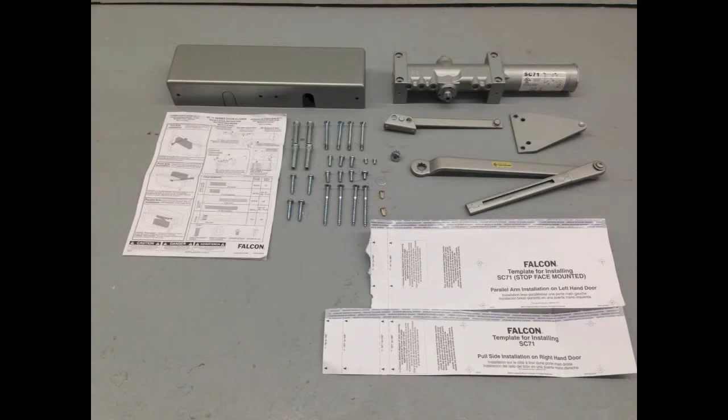These are the tools you will need. In the box, you will find the closer, regular arm, parallel arm bracket, rod and shoe, cover, screw pack, instruction sheet, and stick-on template. Unless specified otherwise, the Falcon SC71 is a universal closer that comes with all parts necessary to be installed with a regular arm, parallel arm, or top jamb mount.

The screw pack contains fasteners for wood and metal openings. You will have screws left over at the end of this installation. If this is a new construction project, check the hardware schedule to confirm you have the correct closer for the opening.

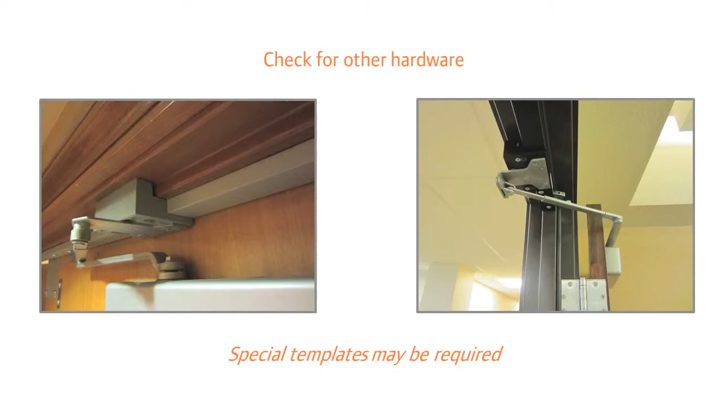Check the opening for other hardware mounted on the top jamb. Items such as a coordinator or overhead holder can affect the installation of the closer, and special templates may be required. Ensure the door swings freely, fits into the frame without binding, and that any latching hardware engages easily. There should be a 1/8 inch gap on the top and sides between the door and frame.

Determine the handing of your door. To determine the hand of your door, first put your back to the jamb where the hinges are. If the door swings to your left, it's a left-hand door. If the door swings to your right, it's a right-hand door. Next, determine how far the door opens and find the matching line on the template. In this opening, the door will open to 150 degrees.

With the door closed, affix the self-adhesive template to the inside of the door, aligning the edge of the template with the hinge and top edges of the door, as shown on the label. For doors with pivots or swing clear hinges, locate the closer and shoe from the pivot point of the door. Using the center punch, mark the locations to be drilled on the door and frame. Remove the template from the door.

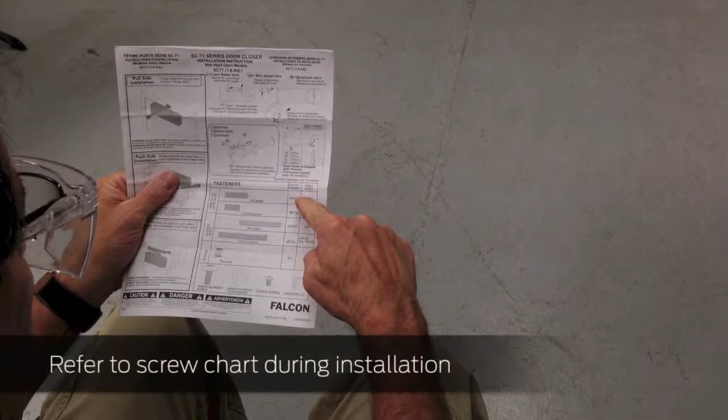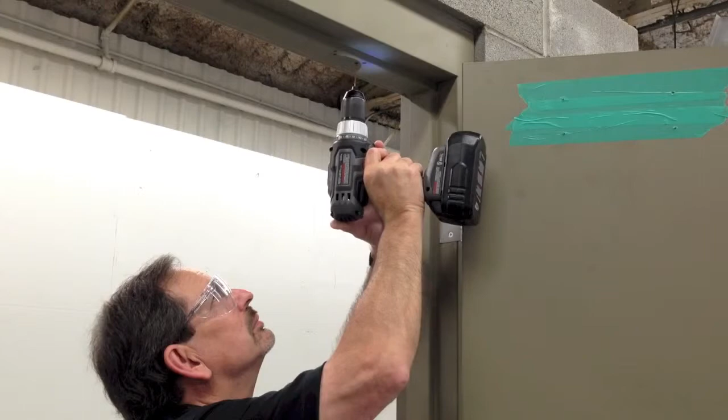Follow the screw chart on the front page of the installation instructions to determine the proper fasteners for each step. This chart also shows the size of the pilot hole needed for each type of screw. Using a number 7 drill bit, drill pilot holes in all marked locations on the door and frame. Using a 1/4-20 tap, tap each hole on the door and frame.

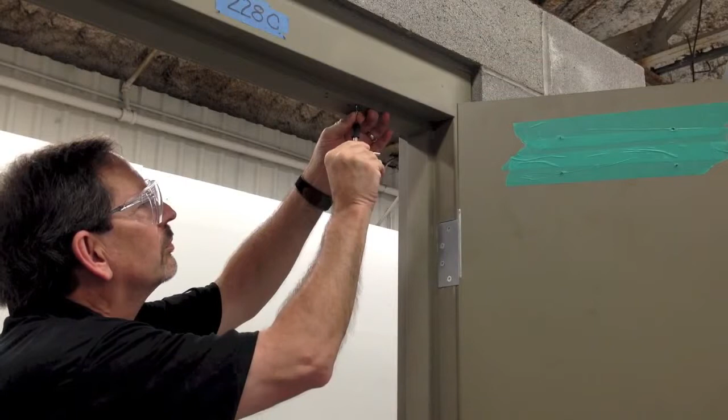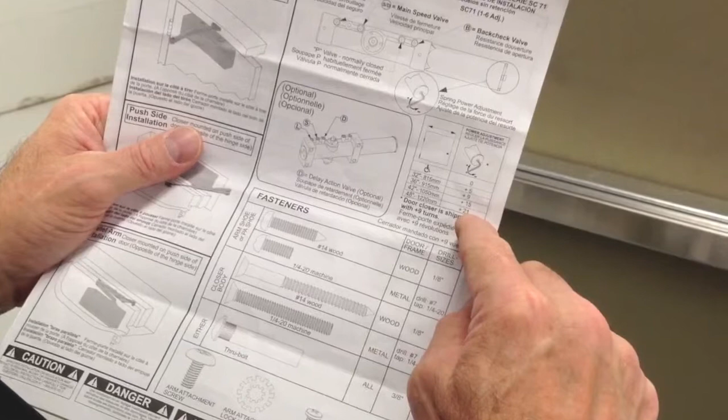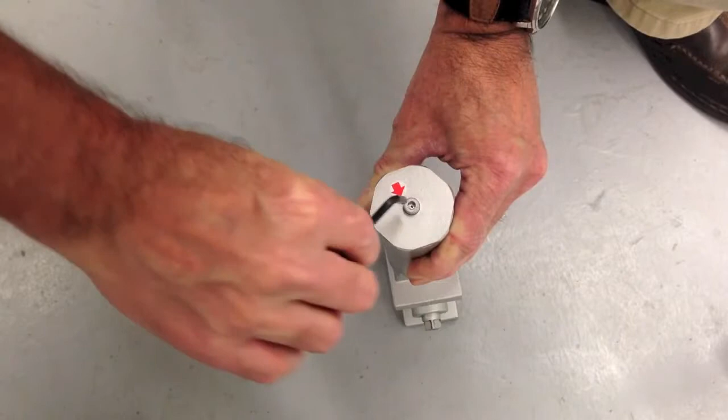The Falcon SC71 spring power can be adjusted to provide proper closing force for your door. Please note, an improperly adjusted spring may result in personal or property damage. Using the chart and the instructions, determine the spring power setting based on the door width and location of the opening. Falcon measures spring power by number of turns. Locate the door width and the corresponding number of turns. Adjust the spring to the correct number of turns using the 5/32 hex wrench.

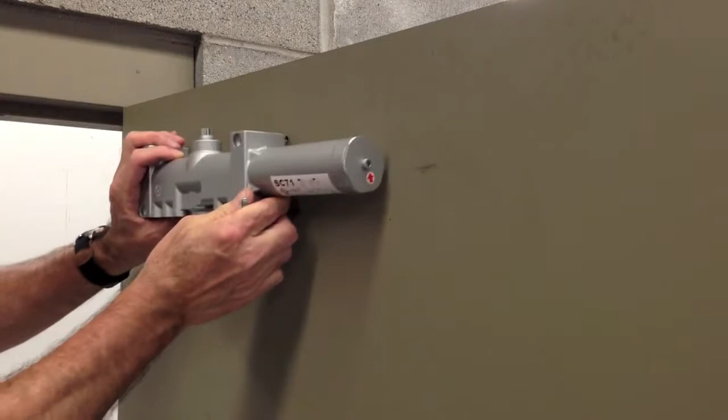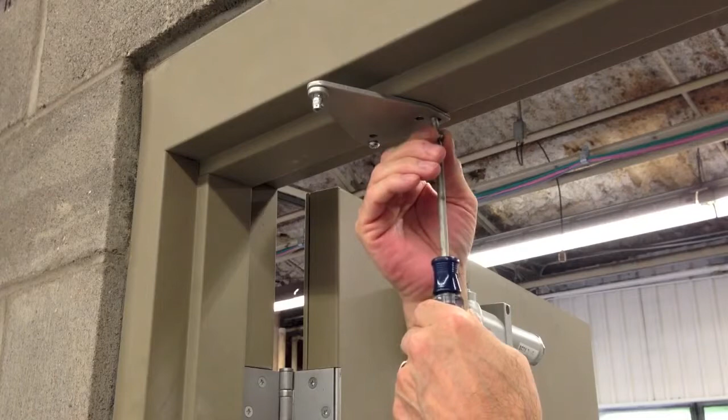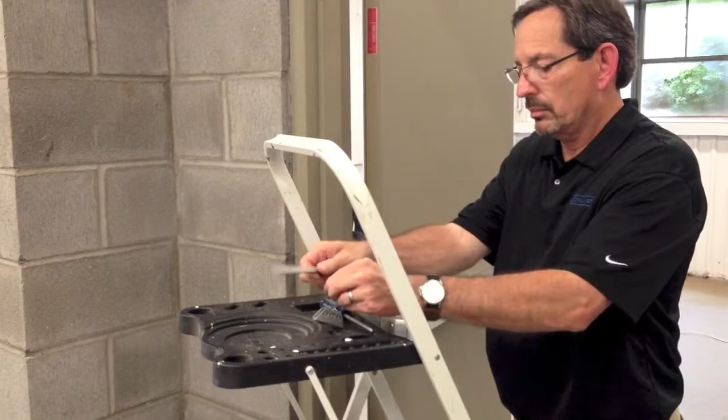In this video, we are installing on a left-hand door. The closer body is installed with the adjustment screws facing down and the spring tube facing away from the hinges. Attach the closer to the door using the 4 screws. Install the parallel arm shoe onto the frame using the 4 screws. Remove the rod from the arm shoe and, using the same screw and the washer from the screw pack, attach the rod to the parallel arm shoe post.

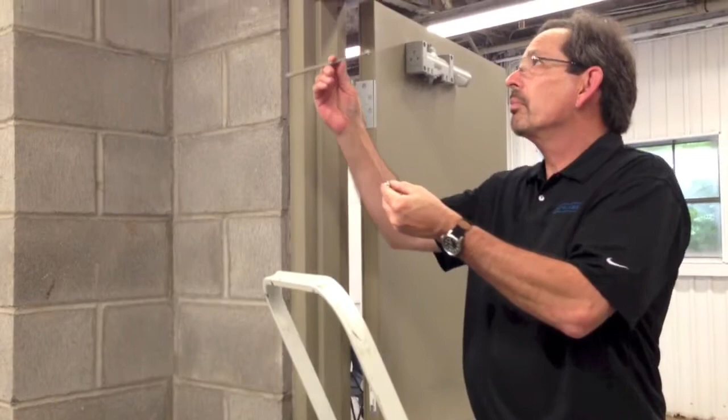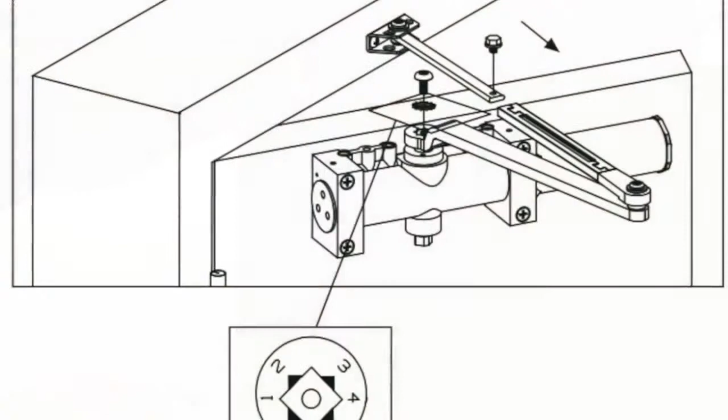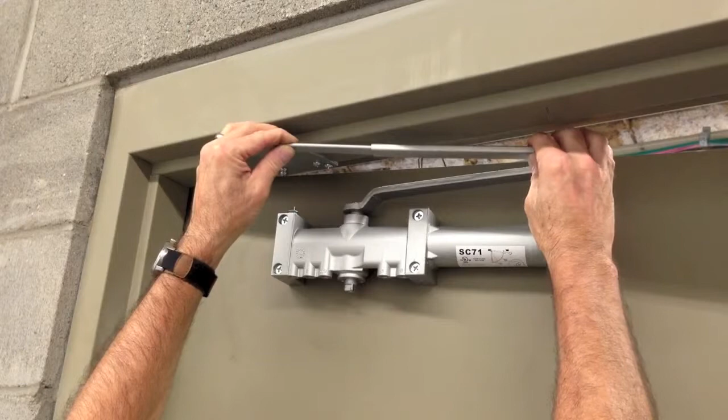Using the adjustable wrench, preload the lower pinion to 45 degrees and hold. Attach the main arm to the upper pinion on the closer body and secure with the screw. Ensure the flat on the pinion aligns with the arm as shown in the diagram. Open the door slightly, slide the arm tube over the rod. Begin fastening the arm screw through the tube and into the rod, but do not tighten. With the door closed, pull the main arm slightly away from the door, just past parallel, and tighten the screw.

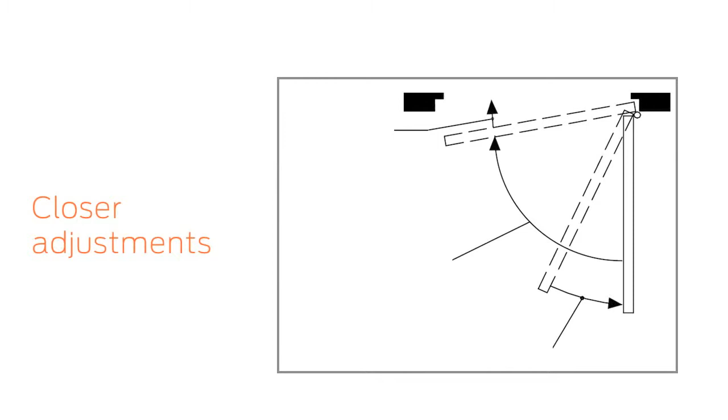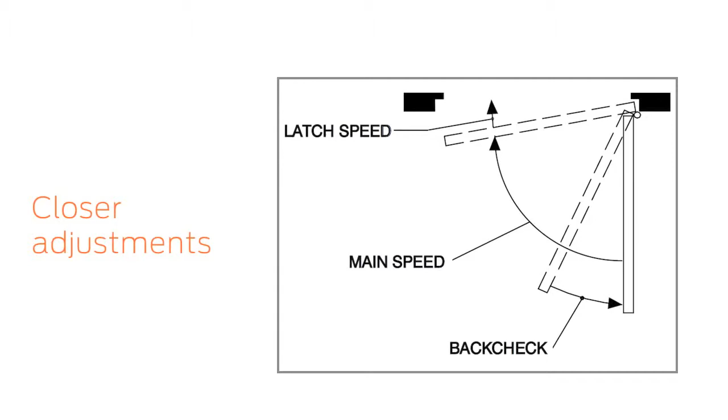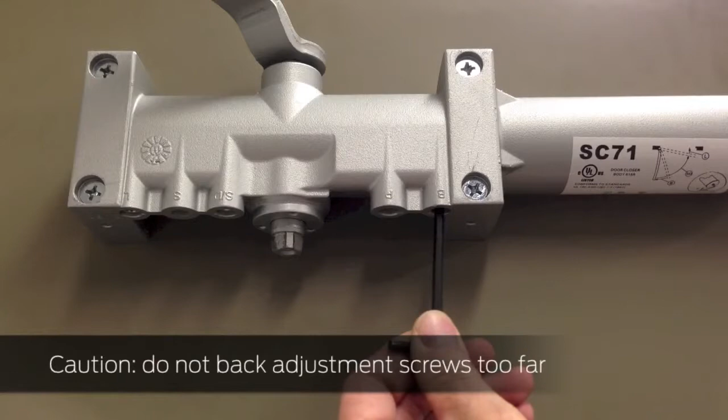Making adjustments to the closer allows you to control the motion of your door. There are 3 hydraulic adjustments that provide for optimal door closer operation. The closer comes from the factory adjusted for a typical opening. Your closer may need additional adjustments depending on your installation requirements. Before making any adjustments, cycle the door twice to observe its operation. Please note, do not back out the adjustment screws too far. If you are close to backing out the screw completely, you should feel increased resistance. Once you feel this resistance, do not back the screw out any further.

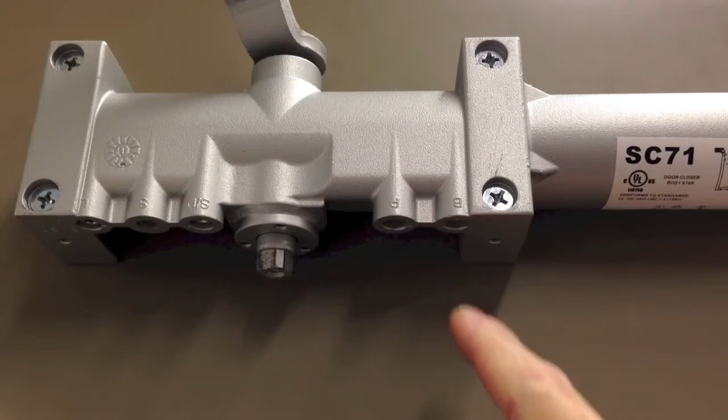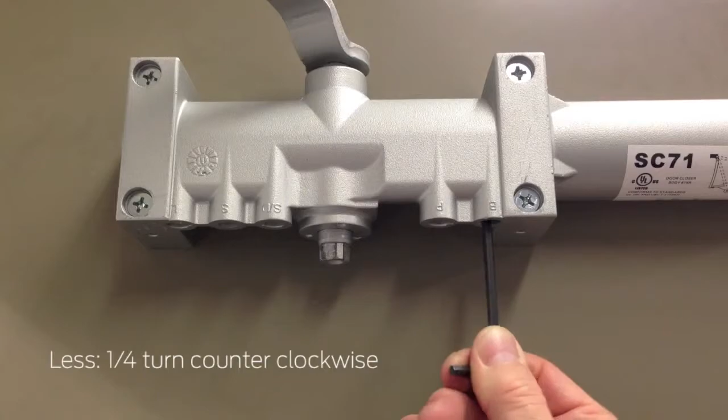Back check is the hydraulic cushioning to slow the door as it opens. This usually starts at 70 degrees. The door will slow down to reduce wear on the door, wall, and hinges. Back check does not serve as a door stop. To adjust it, locate the back check screw, which is the screw closest to the spring tube. If additional cushioning is needed, turn the screw 1/4 turn clockwise and test. If less cushioning is needed, turn the screw 1/4 turn counterclockwise and test. Do not use abrupt back check or use back check as a door stop.

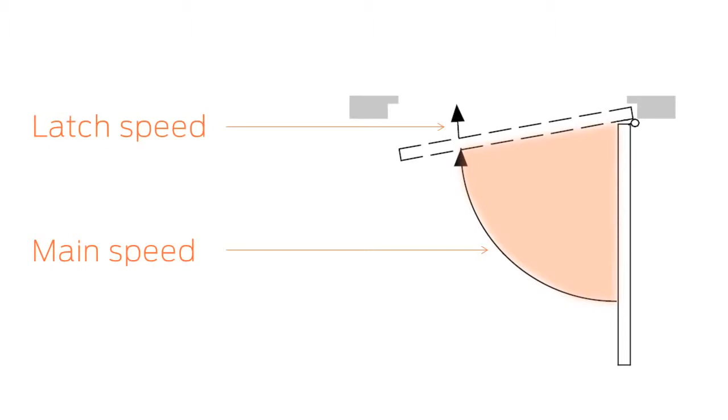The next 2 hydraulic adjustments are main speed and latch speed. The main speed is the speed at which the door closes from its fully open position to about 20 degrees. The latch speed is the speed at which the door closes during its last 20 degrees of closing. When changing these 2 closing speed adjustments, remember the Americans with Disabilities Act requires doors to take at minimum 3 seconds to close, from 70 degrees to within 3 inches of the latch.

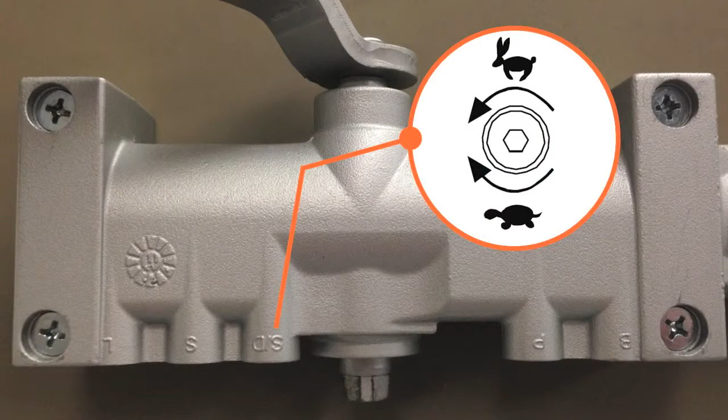Locate the main speed screw. It is the valve closest to the pinion, on the side away from the spring tube. Make an adjustment 1/4 turn at a time, clockwise to decrease speed and counterclockwise to increase speed. Then, open the door and release it to observe the closing speed.

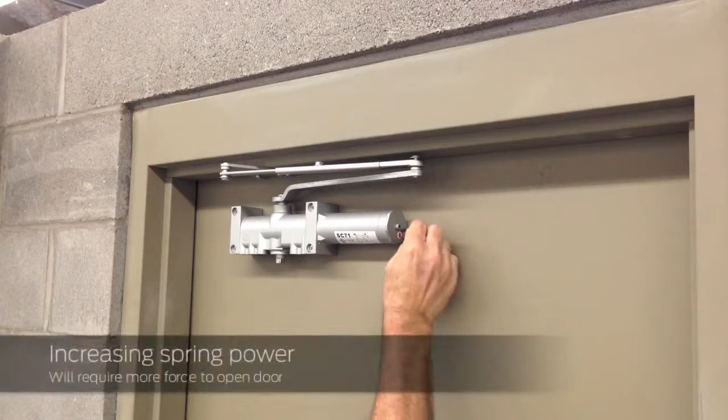Latch speed is the final adjustment. We recommend only small adjustments to latch speed. The latch speed screw is the adjustment screw farthest away from the spring tube. Make an adjustment 1/4 turn at a time, clockwise to decrease speed and counterclockwise to increase speed. Then, open the door all the way and release it to observe the latching speed. If the door is still not latching, increasing the spring power can provide additional closing force. However, increasing the spring power will require more force to open the door.

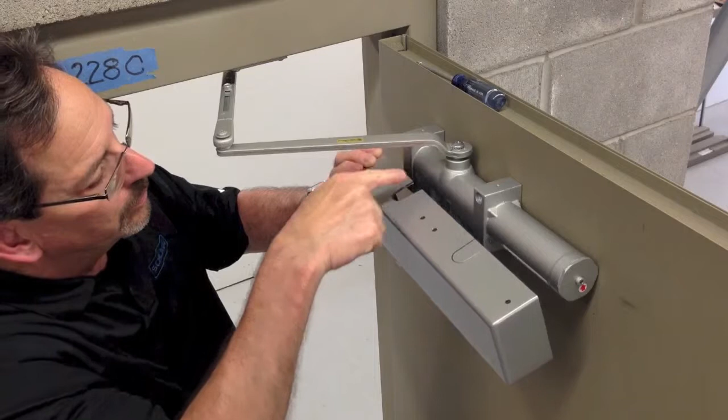To install the cover, remove the knockout. Then attach the cover to the closer body with the 2 screws. To complete the installation, place plugs into the remaining cover holes.